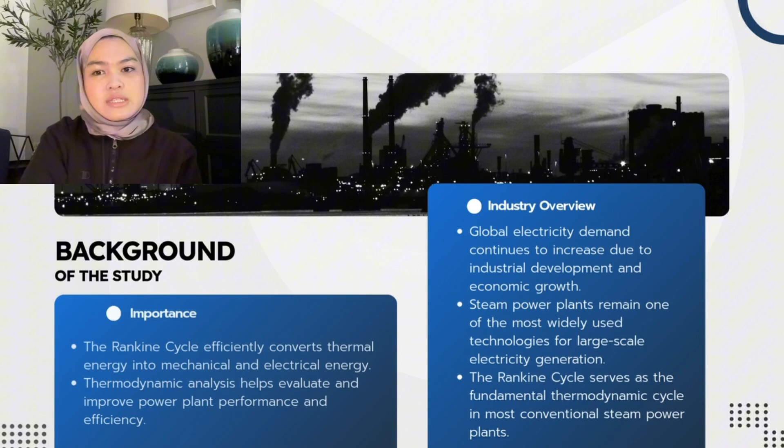electricity generation. The operation of most conventional steam power plants is based on a Rankine cycle, which converts thermal energy into mechanical energy and subsequently into electrical energy. Therefore, thermodynamic analysis of the Rankine cycle is important because it helps engineers evaluate system performance, identify energy losses, and improve the overall efficiency of power generation systems.

Moving on to the problem statement, the increasing demand for electricity requires power plants to generate higher power output while maintaining efficient and reliable operation. However, increasing power generation capacity is not always straightforward.

When a system is modified to produce higher output, its thermal efficiency may decrease due to additional energy losses within the cycle. These energy losses can increase operating costs and reduce the overall performance of the power plant. Therefore, it is important to analyze the Rankine cycle and identify suitable operating conditions that can increase power output while maintaining acceptable efficiency.

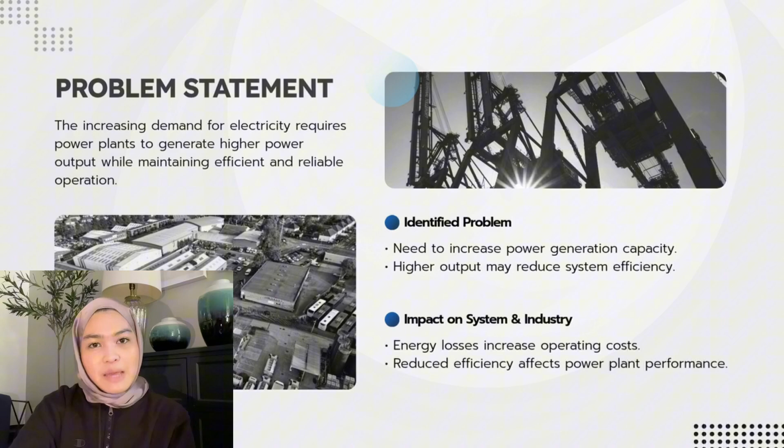The main objective of this study is to design, simulate, and evaluate a 15 megawatt Rankine steam cycle using Microsoft Excel. To achieve this objective, several specific objectives have been established. First, a Rankine cycle model is developed in Microsoft Excel based on thermodynamic principles. Next, suitable operating conditions are determined to achieve the targeted 15 megawatt power generation.

The thermal efficiency of the cycle is then evaluated to assess system performance. After that, modifications are proposed to increase the power output from 15 megawatts to 35 megawatts. Finally, recommendations are provided for future improvements and enhancements to further optimize the system.

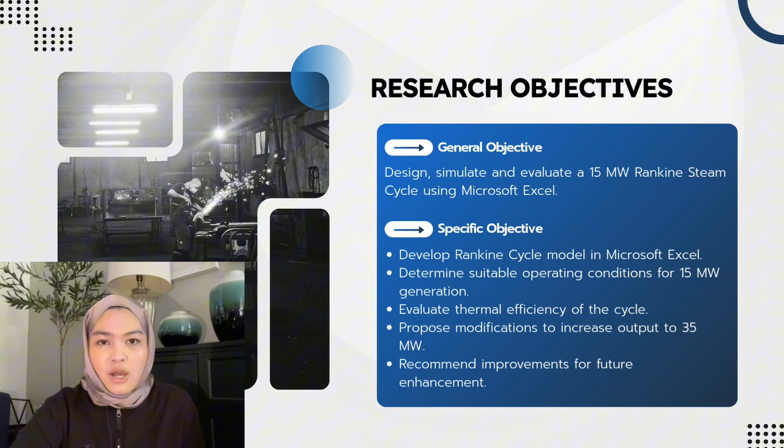Good morning, my name is Dayang Nurul Balkis and I will be presenting the methodology of our study. First of all, Microsoft Excel is used to perform thermodynamics calculations, mass and energy balance analysis, and the cycle performance evaluation. A simple Rankine cycle consisting of a boiler, turbine, condenser, and feed water pump was chosen. The cycle was designed to produce a net power output of 15 megawatts.

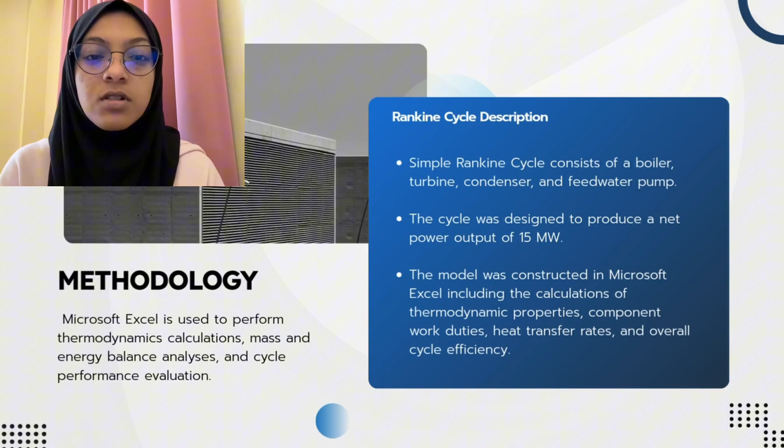The model was constructed in Microsoft Excel, including all the calculations, component work duties, heat transfer rates, and overall cycle efficiency. For the system overview, the first component is a boiler. It is the heat addition unit of the system. Water entering will absorb heat and convert into high pressure, high temperature steam.

Second, turbine. The turbine will convert the thermal energy of the steam into mechanical work. Next, the condenser will remove heat from the exhaust steam leaving the turbine. Steam condenses into liquid water. Lastly, feed water pump. The feed water pump will increase the pressure of the condensed water before it enters the boiler.

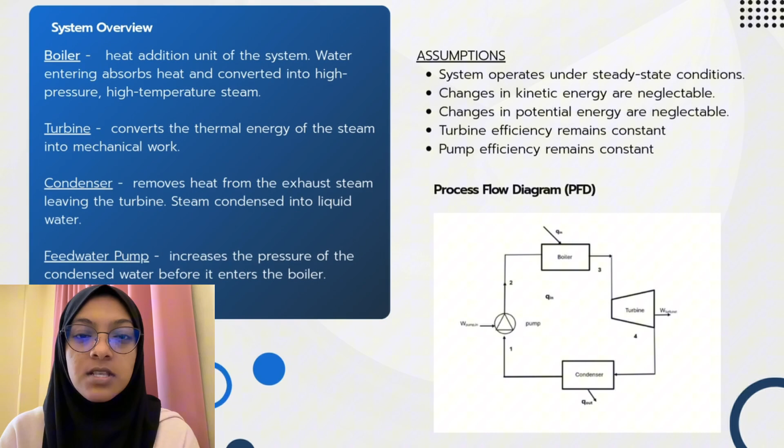There are several assumptions made in this study. First of all, the system operates under steady state condition. Changes in kinetic energy and potential energy are negligible. Turbine efficiency remains constant and pump efficiency also remains constant.

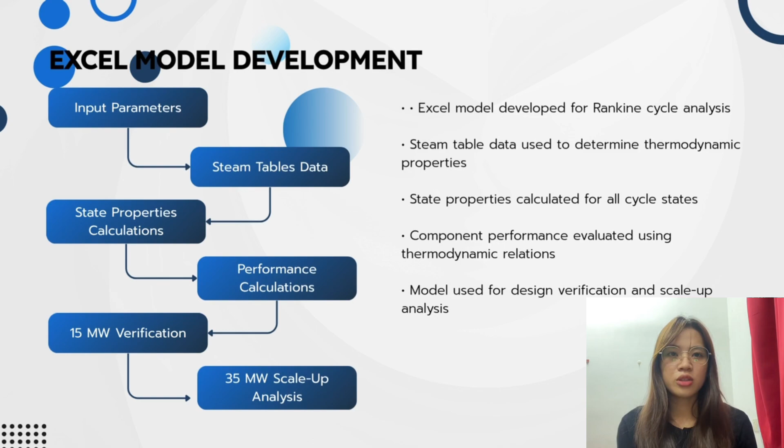This study utilized Microsoft Excel to develop a Rankine cycle simulation model. Steam table data were incorporated to determine the thermodynamic properties at each state of the cycle. The calculated state properties were then used to evaluate component performance, including turbine work, pump work, heat transfer, and thermal efficiency. The model was first verified for the required 15 MW power output before being applied to the 35 MW scale-up analysis. After developing the Excel model, the thermodynamic properties at each state were determined.

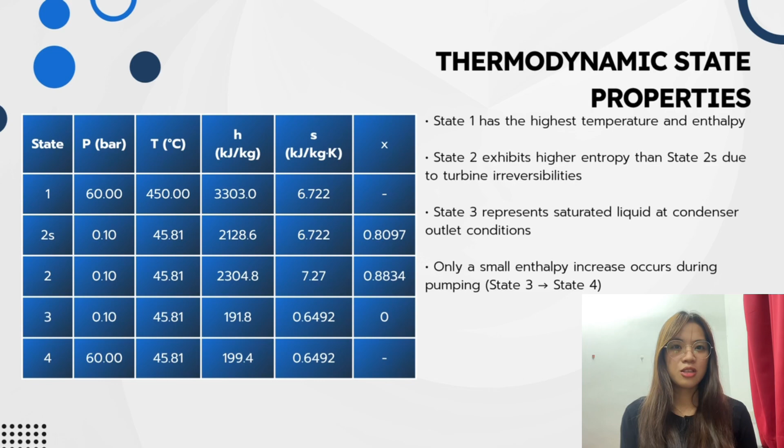This table presents the thermodynamic properties calculated for each state of the Rankine cycle. State 1 represents the turbine inlet condition and possesses the highest temperature and enthalpy within the cycle. State 2S represents the ideal turbine outlet condition obtained through isentropic expansion, while State 2 represents the actual turbine outlet condition after accounting for the turbine inefficiency. The increase in entropy from State 2S to State 2 indicates irreversible losses within the turbine. State 3 corresponds to saturated liquid leaving the condenser, while State 4 represents the compressed liquid entering the boiler. Using these state properties, the cycle performance parameters will subsequently be evaluated.

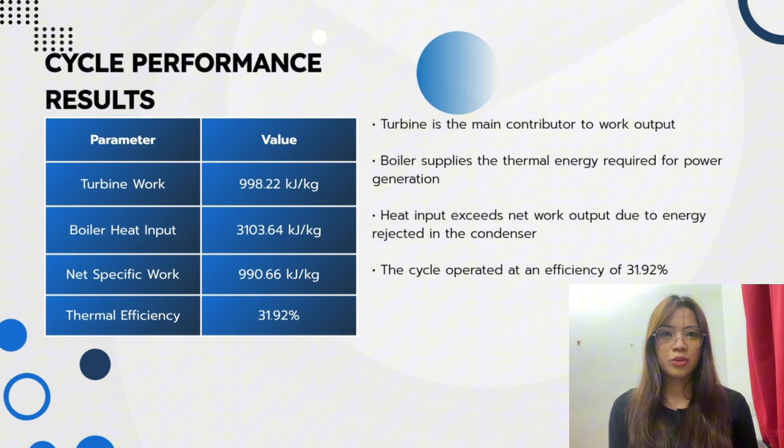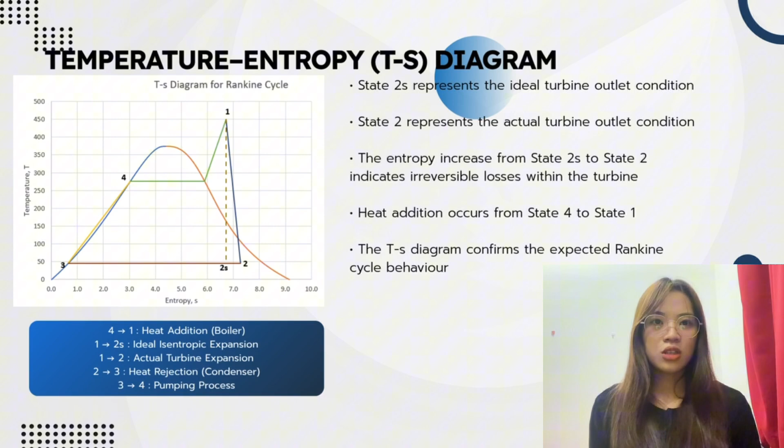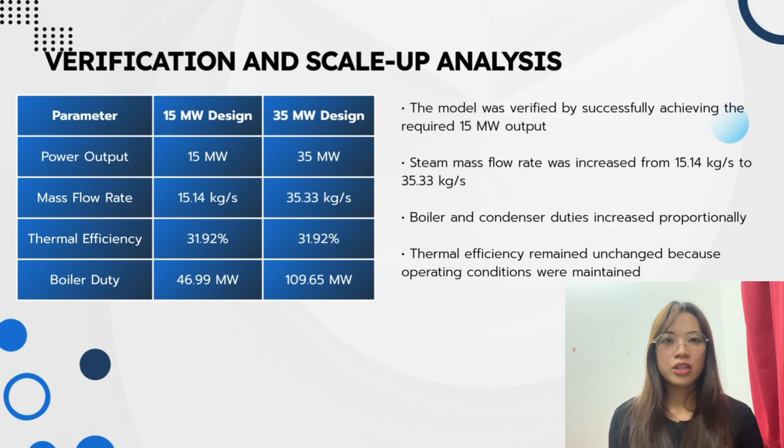However, the thermal efficiency remained unchanged at 31.92% because the operating pressure, temperature, and component efficiencies were maintained constant. This demonstrates that the increase in power output was achieved by increasing the steam mass flow rate rather than improving thermodynamic efficiency. This successfully met the project objective of scaling the Rankine cycle power plant from 15 MW to 35 MW while maintaining the same thermodynamic operating conditions.

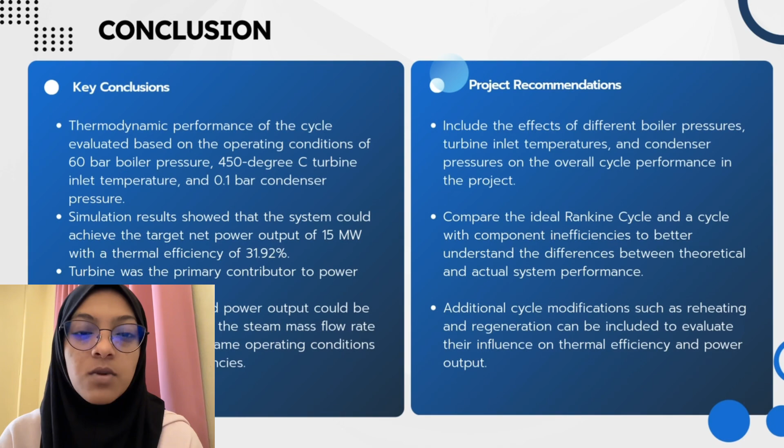For the recommendations for the next project, we should include the effects of different boiler pressures, turbine inlet temperatures, and condenser pressures on the overall cycle performance. Then we can compare the ideal Rankine cycle and a cycle with component inefficiencies to better understand the differences between theoretical and actual system performance. Lastly, additional cycle modifications such as reheating and regeneration can be included to evaluate their influence on thermal efficiency and power output.